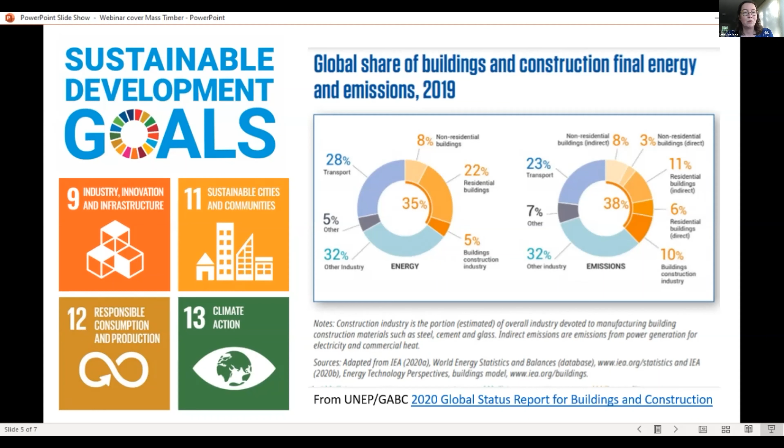Before I introduce our distinguished speakers, next slide, I would like to very briefly contextualize the importance of mass timber as a sustainability solution. Now, in 2015, the United Nations established a set of 17 high-priority sustainable development goals, which both provide a shared blueprint for achieving a peaceful and prosperous future for us all, and serve as an urgent call for action by all countries. I've highlighted 4 of these goals here.

Number 9, build resilient infrastructure, promote inclusive and sustainable industrialization, and foster innovation. Number 11, make cities inclusive, safe, resilient, and sustainable. Number 12, ensure sustainable consumption and production patterns. And number 13, take urgent action to combat climate change and its impacts. Utilizing mass timber helps us make progress on all of these goals.

I've also included a figure from the UN Environmental Programme's 2020 Global Status Report for Buildings and Construction. Now, as you can see, in 2019, buildings accounted for 35% of global energy use and 38% of global carbon emissions, with 10% of those global carbon emissions attributed to building construction alone. If sustainably grown and harvested, mass timber can be a greener replacement for steel and concrete and help decrease the industry's carbon footprint. Now, with that, let me introduce the speakers.

Our first speaker will be Thomas Corrado, a senior associate from Hickok Cole. He has been part of Hickok Cole Architects since graduating from Clemson University in 2006 with a Master's of Architecture. Thomas has worked on a variety of projects ranging from large-scale commercial interiors for the Department of Justice to projects that include the Center for Strategic and International Studies.

Our second speaker will be Eric Ross, a partner at William McDonough and Partners. Eric Ross has more than 20 years of experience in the building design and construction industry. And after 4 years of service in the Army, he earned both a bachelor's and a master's degree in architecture at the Savannah College of Art and Design. Eric joined William McDonough and Partners in 2013 with a background in hospitality, commercial, and high-end residential projects. Joining Eric Ross will be his colleagues, Alistair Riley and Joseph Marchetti.

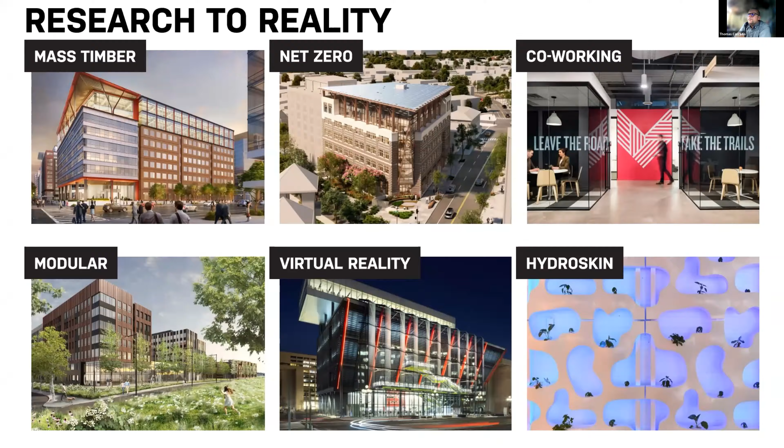I started looking at the mass timber component about 5 years ago. And that was really advantageous when we were approached by Columbia Property Trust to look at their 80 M Street project. So to set up a little bit about the project, the goal was to design a vertical expansion for the existing 7-story occupied office building, and to create an exciting and differentiated product within the DC market. We achieved our goal, and we're currently in construction on about a 100,000 square foot addition utilizing a full mass timber structure. We're adding 2 full stories to the building plus an occupied penthouse.

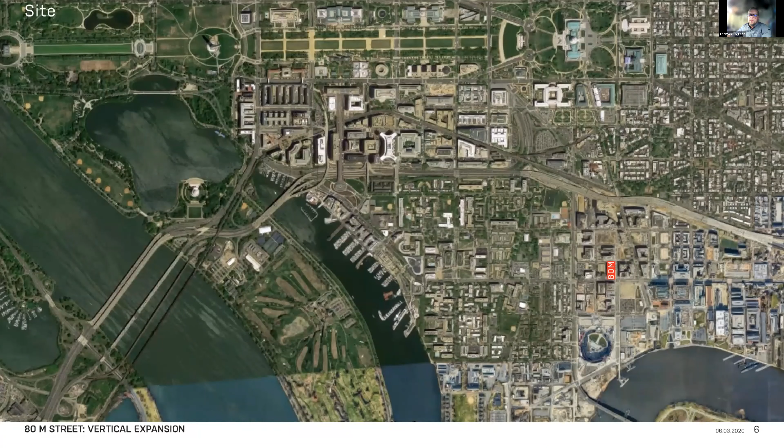The project itself is located in the Capitol Riverfront Navy Yard submarket of Washington, D.C. This neighborhood has seen drastic change over the past 10 to 15 years. It's truly a mixed-use neighborhood, a good mixture of commercial office, housing, and entertainment, which is a bit unique to Washington, D.C. Typically, we're all office or residential, so this is a really eclectic neighborhood, and there's a good vibrancy to it. The existing building was actually constructed in 2000 and was one of the first, if not the first, new development in that market in a long time. And in the last 10 to 15 years the neighborhood has really grown up around it.

And this building really was due for an update. The tenant on the top floor, the 7th floor, their lease was set to expire. So it was the right time for Columbia to really pursue the addition. That vacancy on the 7th floor was really paramount in allowing Columbia to investigate how to vertically expand this. Not having that tenant there, with the remainder of the building being occupied, really allowed us to explore how we were going to do this.

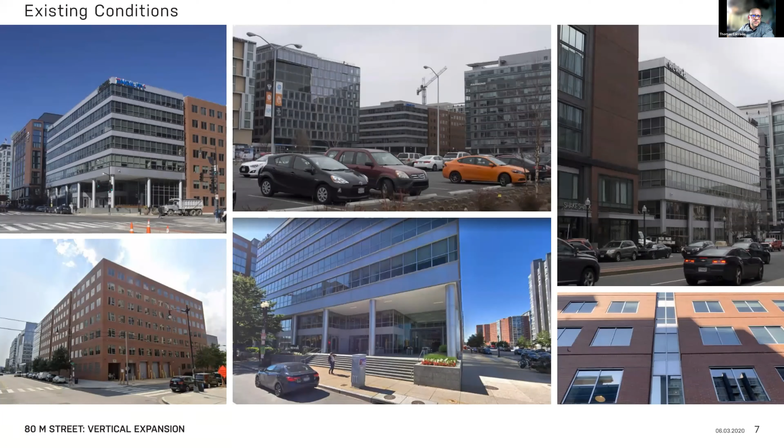So what you see here on the screen is some shots of the building as it existed prior to construction. You can see it's a 7-story structure. It's all concrete. It's a moment frame, and it's a 30 by 30 grid. I'll get into some of the more specifics in a few minutes. But let me jump to the next slide.

So before we arrived at timber as a solution, we really needed to understand the parameters driving the vertical expansion by itself. Vertical expansions are pretty common in Washington, D.C. We see quite a bit of them, and historically they've been done with steel. And that's even an oddity in that DC is really a concrete town. Most of the construction that we do primarily utilizes concrete. But steel has been a way of doing these vertical expansions because it's lighter than concrete, so it offers less stress on the existing structures. In this particular case, the existing structure and the zoning were the two driving constraints and parameters we were looking at.

We developed a number of scenarios to explore the potential of what we could do. And we quickly understood that our limiting factor here was going to be the existing structure. The zoning that we were working with would have actually allowed for 3 full concrete floors plus a penthouse, but the remediation to the structure just wouldn't have been cost effective. There really would have been no way to make it profitable or to make it worthwhile.

So it was interesting because it really became clear right away that we were probably going to be limited in the amount of density that we could put on. And so we understood really early on that 2 full stories and a penthouse was probably the answer and where we were going to end up in order to not impact the existing structure too much.

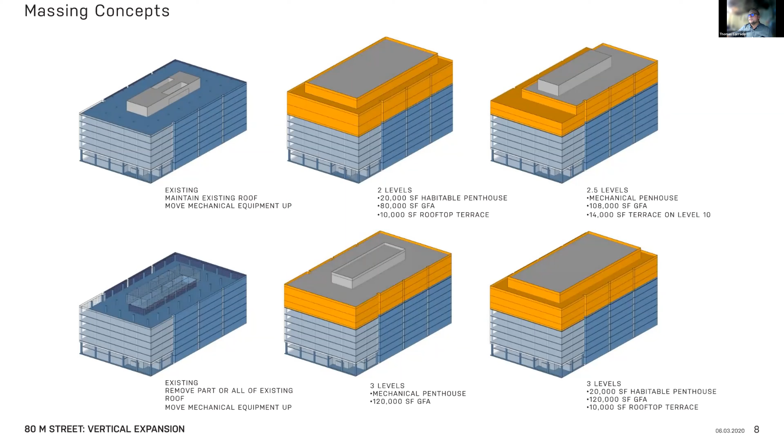So where we ended up in our final section is we have 2 full timber levels that have a slab to slab height of 16 feet. And then we have an occupied penthouse up above that with about a 16-foot slab to slab height as well.

One of the things I want to note here that's pretty interesting, but not in this particular illustration, is that the existing roof wasn't designed to handle an occupied live load for office use. So we needed to reinforce the roof. We looked at utilizing carbon fiber, but that became too costly. But here we were again with this additional height. So we ended up abandoning the existing roof in place, and we created an interstitial layer of steel structure that posted up off of the original concrete structure.

And this was advantageous because it allowed us to reset the grid and create a new structural deck. And it's proven to be really beneficial in construction, in that Davis Construction, who's building it as the GC, was really able to optimize the modularity and the prefab nature of timber. By setting the grid, we didn't have things showing up on site and all of a sudden having to do tie-ins to the existing structure. We were able to set that structure in this interstitial layer.

It also allowed us to reset the grid and go off grid in certain areas where we could transfer off of that, where we wanted to set the building back in places, as you can see in this image, to create terrace space on the new floors where we thought that would be advantageous.

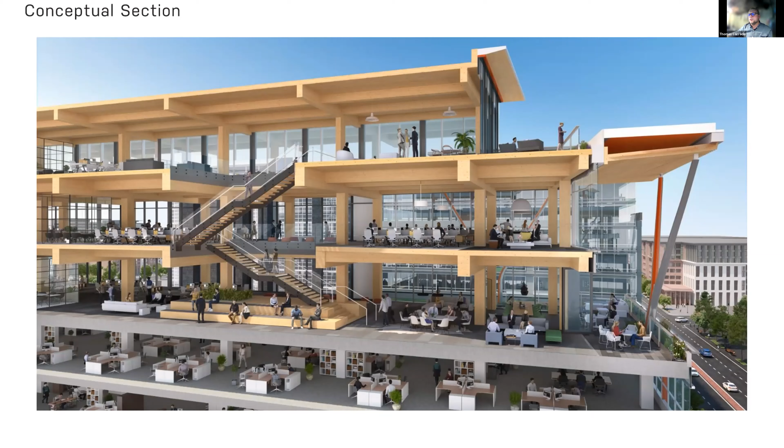Another thing you can see here in the full building section is those top floors and how much greater height they have over what is a typical office floor dimension in Washington, DC. And this was really nice in terms of the overall daylighting. We're able to get a lot more natural light deeper into the space just from having these taller floors. So when you combine that with a wood interior environment, it makes for a really spectacular office environment. And I'll show you some images a little later in the presentation. You can start to see how that's starting to come to fruition here.

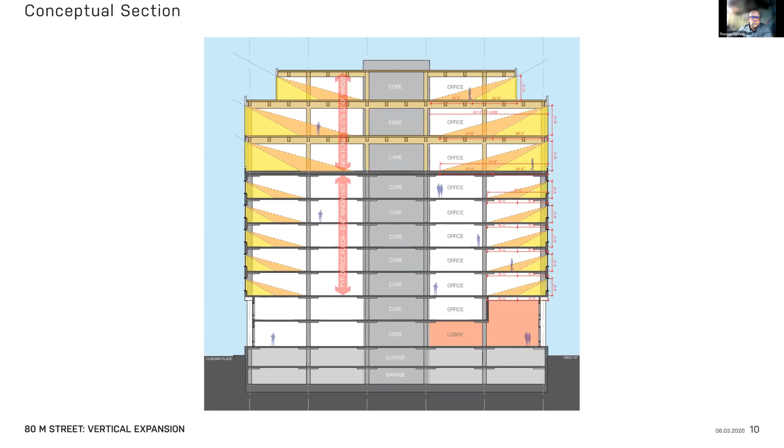With regards to code, this is kind of interesting how we actually were able to build timber above 85 feet. When we started this project, DC was under IBC 2012. So you could build mass timber under Type 4 construction, but you're limited to 85 feet. And of course we knew that the 2021 code, and the images that you see on the screen here, was going to allow timber at a taller height.

Using that knowledge, we had started meeting with DCRA during our research process, DCRA being our local code officials, and had been talking with them about how can we do timber? How can we do this? And they kept saying, well, bring us a real project. Let's find something tangible. Let's find something real, and then we can do that.

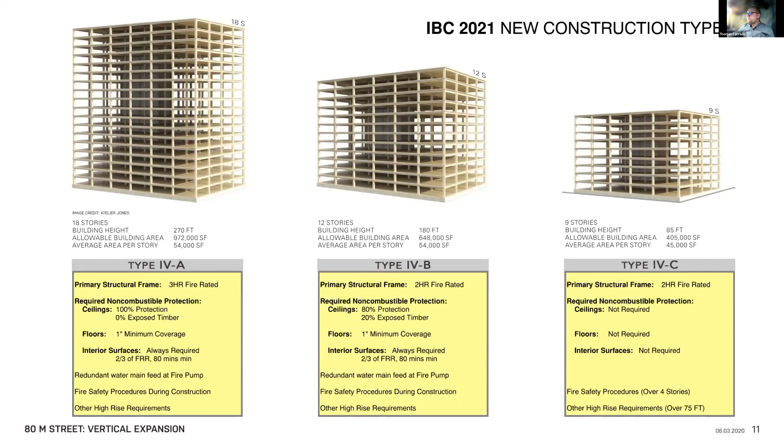So we looked at these 2021 codes for guidance, even though they hadn't been issued. And we started to think about and talk to DCRA about how we might fit our project within these three new types of Type 4 construction that were going to be introduced. The interesting thing is that we really didn't fall in any one of those. We kind of fell in between, because we are really a 3-story timber structure going on top of a 7-story concrete structure.

So how we are defining ourselves is as a 3-story Type 4C building over top of an existing 7-story Type 1B building. So at the end of the day, we're not 85 feet. We're really only 40 feet. And we got DCRA to work with us and to agree to see us in that light. And so we were able to develop a code modification in order to build a high-rise, because we're over 75 feet, timber structure within Washington, DC.

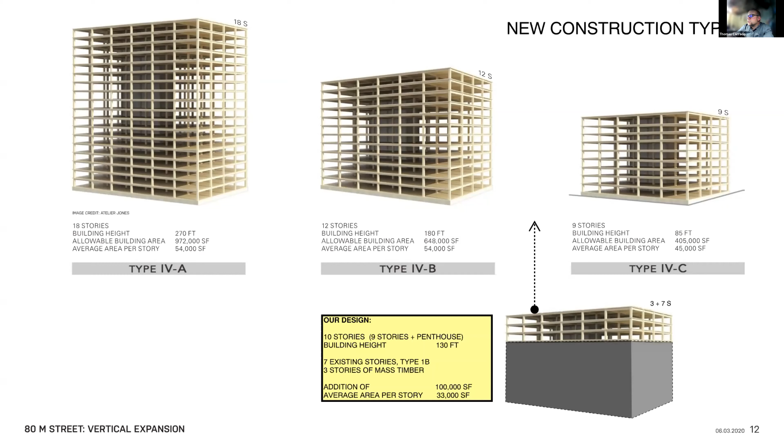Our code modification is essentially that: a timber structure over 85 feet, in our case up to 130 feet, which is the limit as determined by zoning. We also included a few life safety measures. We added a redundant fire pump, which is one of the stipulations that falls under the 4B construction type under the 2021 IBC. That was something we gave to DCRA, not necessarily as a concession, but something we were looking to do to bolster the life safety aspect.

Type 4B allows you to go to a taller structure, but it also requires you to cover a large quantity of the timber. And we were not looking to do that. We wanted to have a fully exposed structure. So we were looking for ways to work with DCRA to allow us to keep that structure unencumbered. The second thing we did there is we upgraded our sprinkler system to regular duty instead of the normal light duty that we would be doing in commercial construction. And so that was really beneficial.

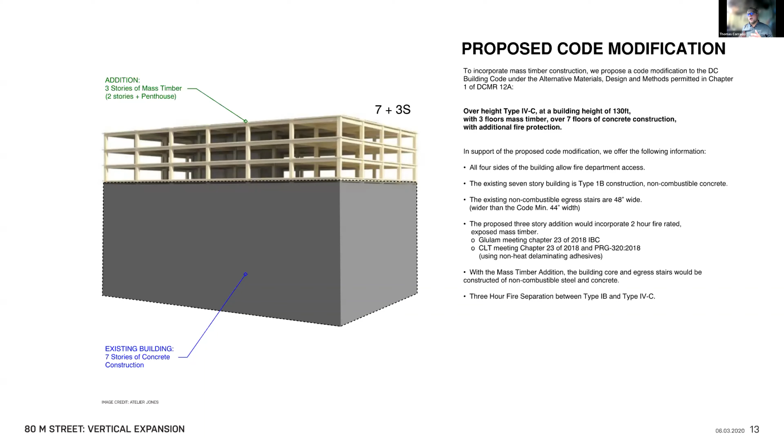We did this early on in the process too, right at the beginning of schematic design, because if we weren't able to get this code modification, then the project really wasn't moving forward. So we worked really closely with our partners at Arup, our engineering partners, plus Davis Construction, plus ownership, and we got the package put together and went to DCRA, and we were able to get that going, and that really set us in motion.

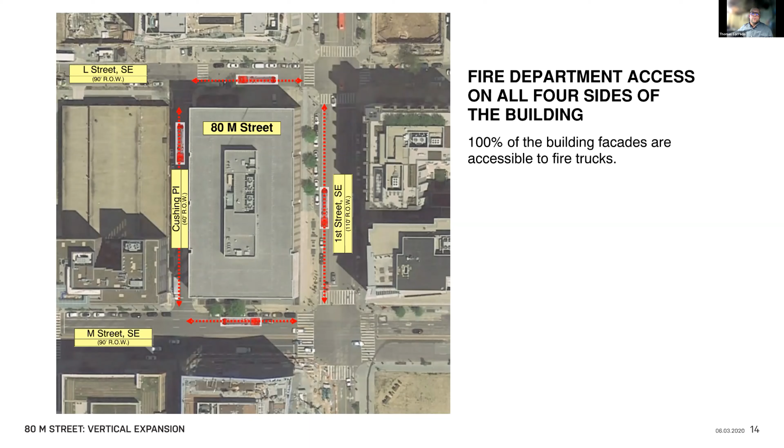One of the other interesting things that we discussed with them was that the building is freestanding on all 4 sides. It has access on all 4 sides for a fire truck. That's something you don't normally see in the district. Normally you're in an alley condition or have a neighboring building. So we were always looking for ways to make this more palatable, because again, we were the first, coming out of the gate, and nobody really knew it. We were just trying to make people feel comfortable with what we were suggesting and bringing to the table.

One of the other things we did is we designed the core as a steel structure. And this was really for 2 reasons. First, we kept our egress stairs in a familiar construction type from a life safety standpoint. So there was a comfort level, again, with the code reviewers. They understood that this was a steel structure. So if I'm in the timber structure, in case of emergency, I'm getting into a stairwell that is a familiar construction type.

And not only that, as I move and I traverse from what is the new 8th floor to the existing 7th floor, I'm going from steel, fireproofed, 2-hour rated, through a 3-hour horizontal separation, and then down into my concrete stair of the existing building. So that was another way of just thinking about a comfort level.

The second thing was that we used the steel as kind of a lateral structural system. At the time, timber wasn't allowed to take lateral per code. So we were looking for the steel to do that. The existing building itself is a moment frame. And so when we added the new floors to the structure, we needed to account for the new lateral loads that were going to be imposed on the building.

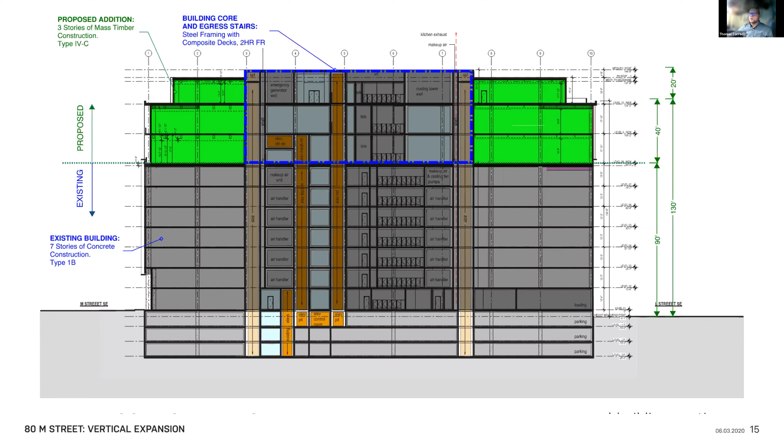And so there were actually no shear walls down through the existing building. So we created brace frames within the footprint of the existing core, and then tied those down into the moment frame as you move vertically down through the building.

At the end of the day, one of the really interesting things was that the wood structure proved to be so light that we actually only ended up remediating and reinforcing 4 columns through the existing building. So we had really, really minor impacts to the existing building all the way down. We didn't have to do any upgrades to the existing foundation.

So we added 100,000 square feet onto this building with no upgrades to the foundations and really minimal remediation to the existing structure. So in terms of overall costs of an addition and adding square footage, it was a real benefit. And timber, I think, led us there. Now, could we have done this similarly with steel? Probably, but the timber certainly has those same attributes. And at the end of the day, we feel like we're providing a better environment.

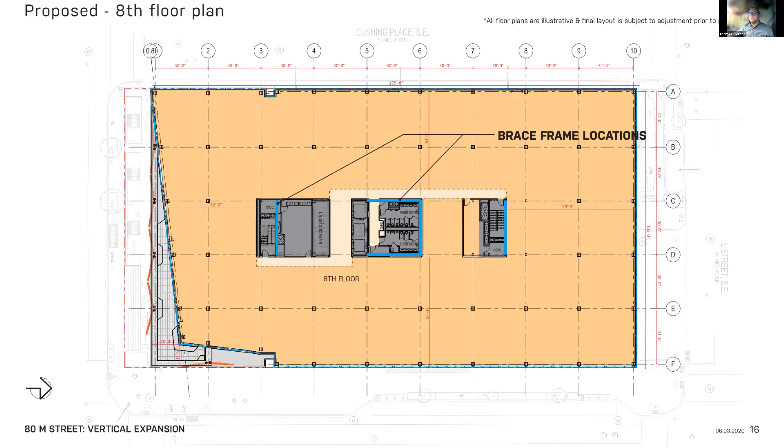Oh, went too far. Sorry. In terms of the typical bay, as I had mentioned previously, the existing column grid for the building is a 30 by 30 grid, which is not necessarily the most optimal when it comes to timber. Timber performs really well in about a 20 by 20 grid. You can keep the member sizes down. They don't get so big.

But in this case, we had the height. We knew we were dealing with a 30 by 30. And so we were able to accommodate these large beam sizes here. So you see our primary girders are upwards of 36 inches deep, and then our secondary beams are 27 inches deep. And we were required to have secondary beams because our CLT panels are spanning that entire 30 feet. So we needed that reinforcement.

The 30 by 30 grid has always been one of our large impediments to timber within the district, because that's the market. That's what the market expects in terms of our column grids. But timber, as you can see here, is challenged to perform at the heights that we typically see, which are normally around the 11'6" range for a concrete structure.

So the overall deck or assembly consists of the primary and secondary beams, and then we have a 5-ply CLT panel. And then we installed a 1-inch Acousta-Mat, which is there to get STC ratings between the floors and to help with footfall. And then we actually have a 3-inch reinforced concrete deck.

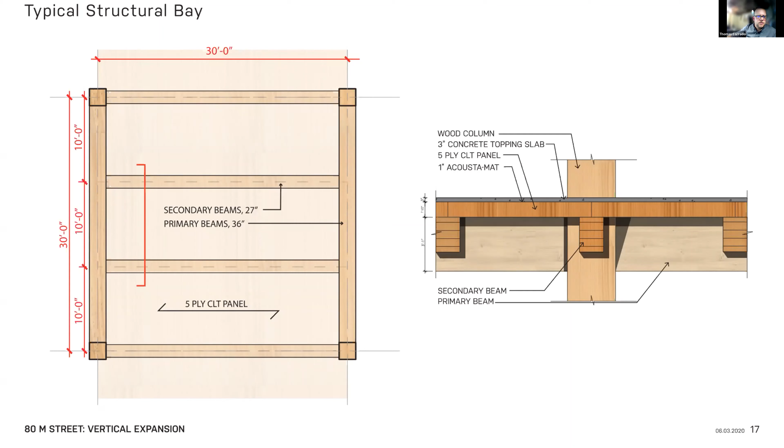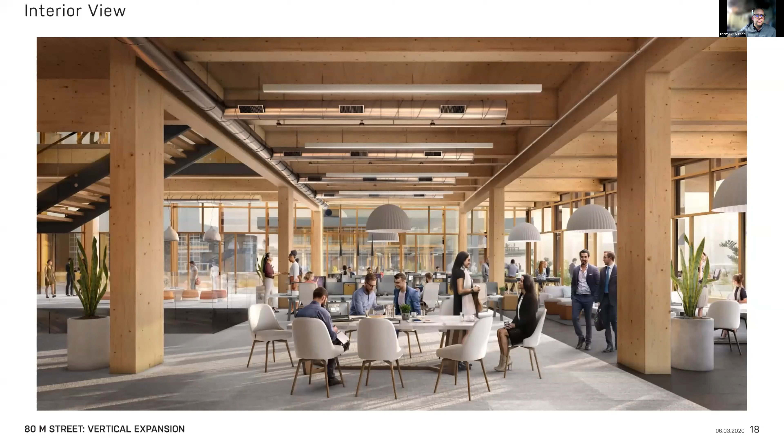Another interesting thing is that because we are a high rise, we were required to have a 2-hour fire rated connection at all of the column to girder connections, as well as the secondary to girder connections. And at the time when we were doing this, there was really only one 2-hour connection on the market. And in our opinion, it wasn't something that was best suited for the project and the type of environment that we wanted to create.

So we worked with Katerra, who is the CLT supplier and installer, and they developed a 2-hour connection for this project. And so they're steel connections. They're completely encased within the timber, which provides the fire protection for the steel itself.

We were able to do this because we had some other aspects of the job that allowed us to have some time. So we were able to accommodate the testing of these connections because we had to expand the elevators. We had to do the reinforcing of the structure itself. So that was advantageous because at the end of the day, we were able to get these approved.

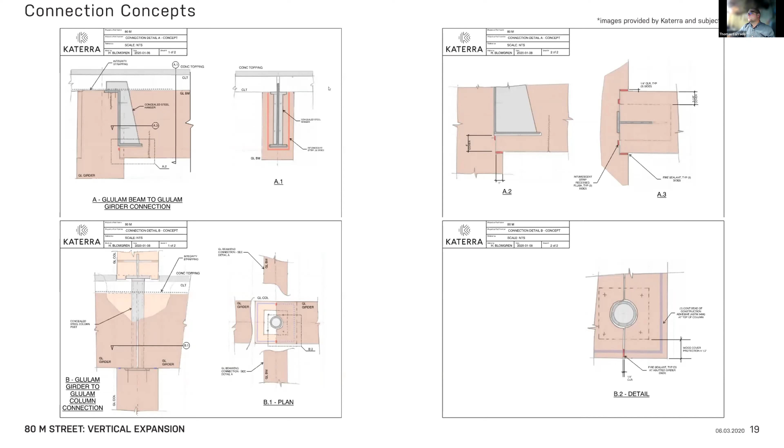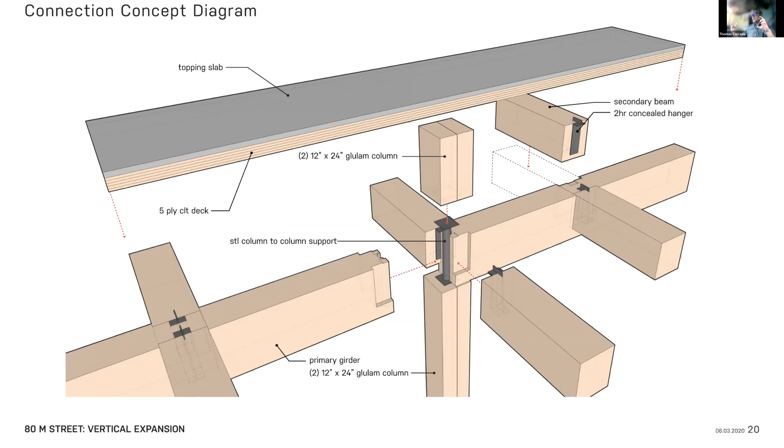And that was really, really beneficial. So what you could see here is kind of that assembly. Each one of you have a post that goes from column to column. The CLT decks go across the primary and secondary beams, and then the secondary beams are kind of hung with these hangers into the primaries, and then everything is screwed together. Everything then is concealed within those connections themselves.

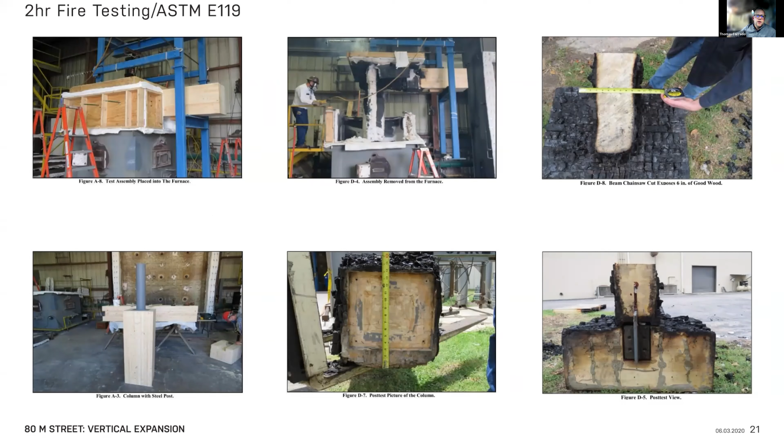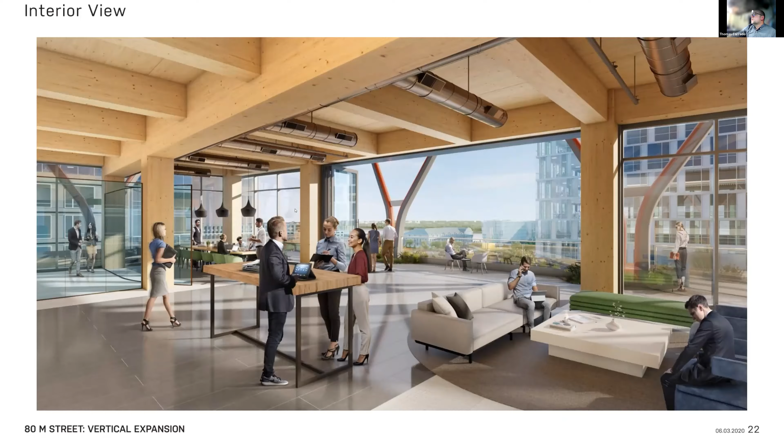And there's 3 ways of looking at it. You can use mass, stiffness, and/or dampening. And Columbia Property was concerned about bringing a timber building to the market that may get a bad reputation if it was deemed to have too much vibration within it. So we worked with Arup, and they actually have a technology.

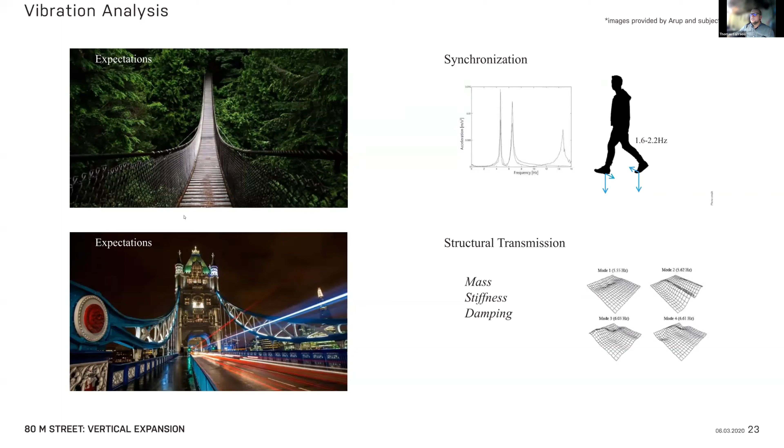They actually have a technology here called a motion platform, where they're able to replicate the vibration of concrete, steel, and timber structures. And then we were able to optimize the design to meet whatever standard we wanted to meet. In this case, we designed the timber structure to feel and act like a steel structure.

And to do this, we added density. We added a couple inches to each one of the girders and a couple inches to each one of the secondary beams. And that ultimately will take some of the excess vibration out in order to get this to act and feel like a steel structure. And this was advantageous to Columbia, obviously, because it takes away some of their risk.

But it was also good in that this is the first commercial project in Washington, D.C., and I think it's important that their market gets comfortable with this new structure and this new technology. And so, by doing that, they're covering themselves, but I think they're also delivering something that everybody will feel really good about at the end of the day.

And I could say in practice, having people come out to the building and visit the structure and everything, it's been really well received in those regards. It's still under construction though.

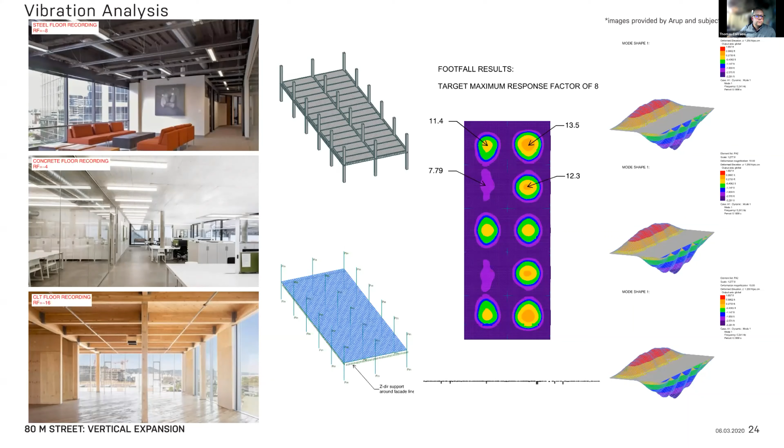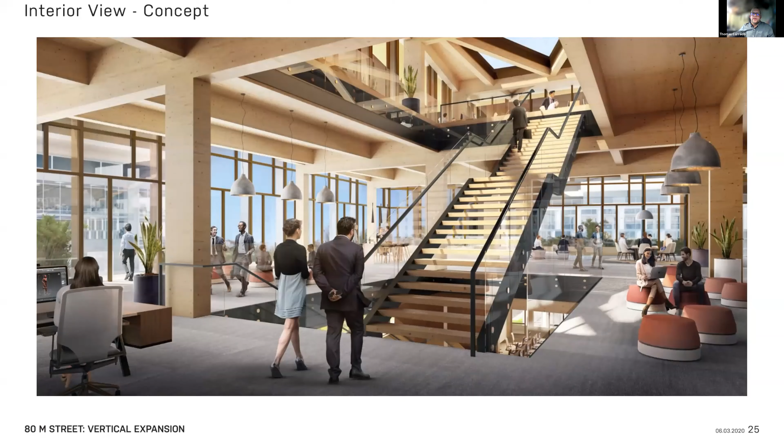There are some different considerations. So it is important to think through your designs and really dot your I's and cross your T's, so to speak. And the same can be said with the exterior envelope systems. If you're using a curtain wall, then you need to design for a curtain wall. And the structure can handle that. It can handle precast or brick. You just need to design to those things. So it's important to work with your partners and to think about those things up front.

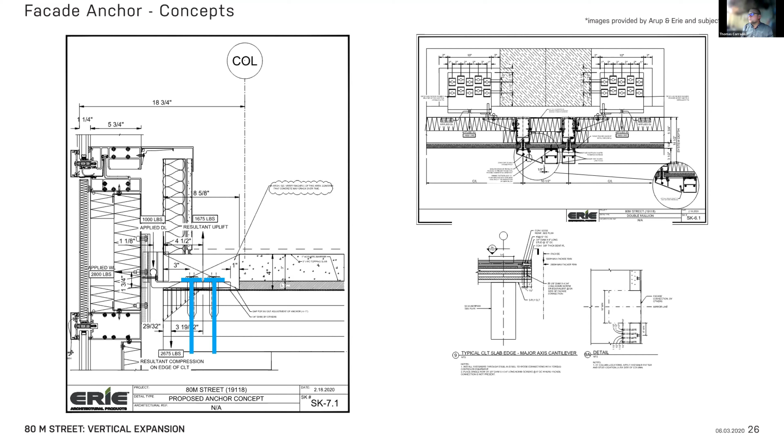And then in our case, we were using for the majority a standard curtain wall system that's going to be hung off of the edge of the timber itself. And so here you can see we worked with Erie, who's the curtain wall manufacturer, and Katerra to work through those connections. And at the end of the day, we're using the same curtain wall anchors that we would normally embed in a concrete structure, except in this particular instance, we're screwing them down into the timber itself, using timber grade, commercial grade bolts. And so that suffices. That's the manner of doing it. And so having knowledgeable industry partners has been advantageous to us in that regard.

And you can see here those connections, and they're screwed at the slab edge. And then you can also see in these images the reinforcement for the structure. So you have the slab edge with the bolts back through that will grab the concrete, and then the reinforcement. These all get tied in, and this will actually move that lateral force back into the steel core itself. And then the curtain wall, which is actually being hung now, will get hung on these anchors just like any other curtain wall structure.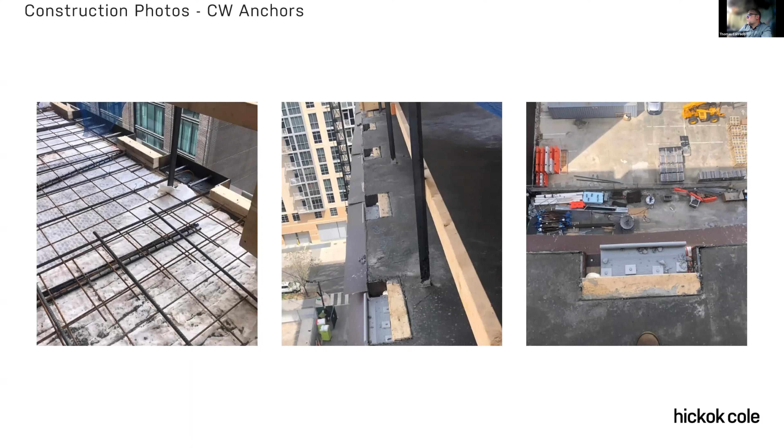With regards to the construction itself, here's a couple photos. These are actually a couple weeks old at this point. There was approximately 70,000 square feet of timber structure that was delivered on site. This all was erected by Katerra. They produced the CLT panels themselves. Nordic out of Montreal was the supplier for the glulam. But Katerra did the install for all of the timber on this particular job. It was installed by a team of 7 that came from Katerra's factory in Spokane. And they installed the full 2.5 levels of timber in 7.5 weeks.

It was an on-time delivery, so the trucks would show up on site, and all the CLT and glulams would be picked off by the crane. They would work on one side, 3 guys setting beams and columns, and another 3 guys on the other side. As those were getting installed, the crane would move over and be picking CLT panels. So it moved very, very quickly, and took a crew of, like I said, seven individuals to install. So in terms of labor and time, I think there's a lot of savings. This project's a little different in that we did have steel and we have the reinforced concrete, so we have a few more trades that maybe you wouldn't normally see in a timber structure. But nonetheless, it was still very, very fast.

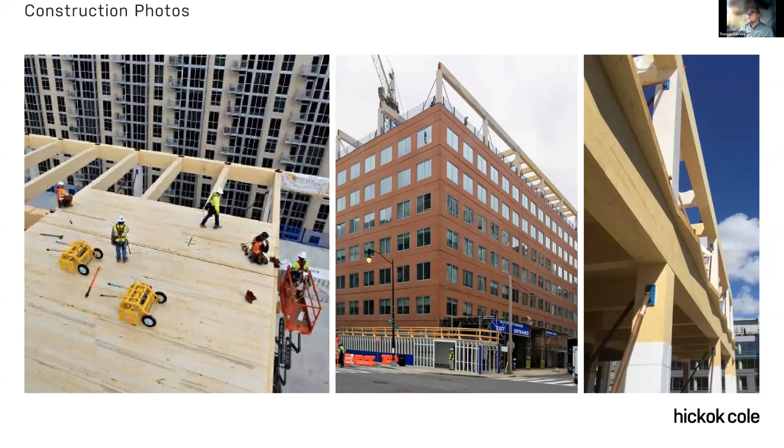And then you can see here, this is what the inside of the space will start to feel like. So really gracious spaces. You can see those beams in this particular image. At the end of the day, when we added depth to the beams to get the vibration out, we ended up at 38 inches deep. And I would say to you here that those don't feel like they're 38 inches deep. Because we have so much height in the overall structure, we're able to accommodate that and make for a really, really amazing interior space.

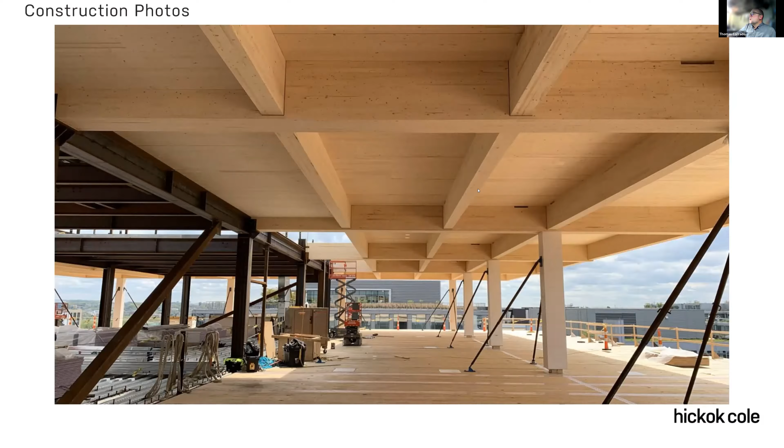And then lastly, some of the ideas of carbon sequestration and the sustainable components for this particular project.

And I think Leah was kind of hinting at some of this earlier. 39% of greenhouse gas emissions come from buildings, 11% of which is the embodied carbon from building products and construction. And I think mass timber holds a special place for us in order to reduce that and contribute to these high performance and low carbon buildings.

In fact, recent research suggests development of mass timber buildings constructed globally will double every 2 years between 2020 and 2034, which will allow North American building construction to reach carbon neutrality. So those are lofty goals, but they're there.

80M itself uses about 1,400 tons of mass timber, again, which is all manufactured, sourced, and installed by Katerra. That incorporates about 2,500 cubic meters of timber, and the wood necessary to produce this timber for this project could be grown in 8 minutes in North American forests. So just some interesting things about the sustainable nature and the renewability of the resource itself.

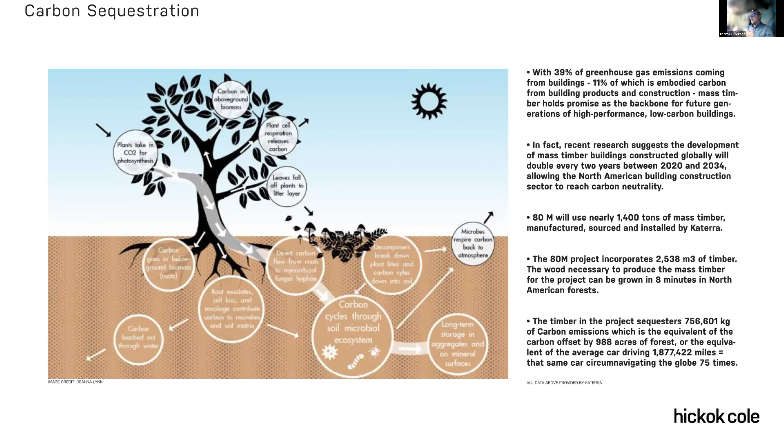And in this particular instance, the project sequestered a large amount of carbon, which is equivalent to driving around the globe 75 times. So just some metrics we're thinking about, trying to use the data and put it in a way that people understand. Thinking about how much a car would drive and how much time, that's how much carbon we're taking out of the environment by utilizing timber in this scenario.

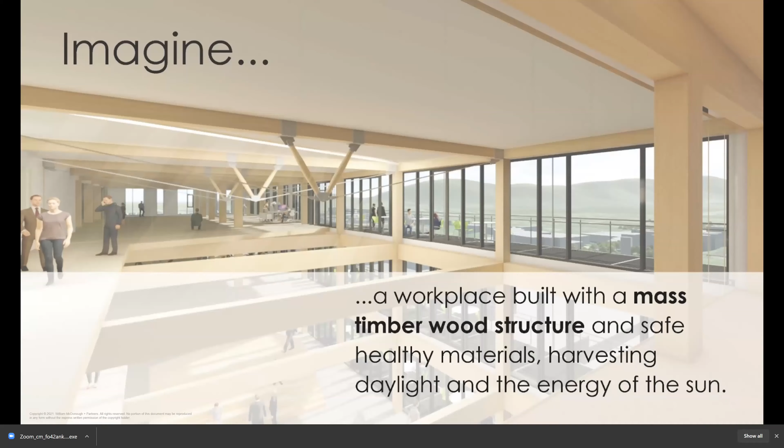So we're going to talk about Apex Plaza. As Tom said, the story around wood and the impact is a critical one. Apex came to us with the idea of how they could bring their workforce together in one place. Apex is a clean energy company that was a startup out of the Darden Business School at UVA back in the 90s. They've since grown. They were in 3, if not 4 different buildings, and their first desire was to get everybody into one office so they could collaborate. The next was to prove what they're doing with the energy grid, and think about embodied carbon and offsetting that carbon within the building systems.

When we approach a project, Bill McDonough likes to talk about the 5 goods: good, clean energy, safe and healthy materials, clean water, circular economy, which we'll talk about a little with design for disassembly, and good lives. How can we create safe, healthy buildings with maximized daylight, views and connection with nature? When we take those to Apex Plaza, one of the first things was going for carbon-free energy. So how could we be 100% renewably powered on site, going all electric, getting away from fossil fuels, and then operational energy as well.

We've got battery backups for Apex. So a focus for them that became clear from the start was, how can we think about climate-friendly materials? We focused on mass timber. We've been working with Nordic Structures and other timber suppliers in Europe. We've done 4 different projects, so going with mass timber made perfect sense.

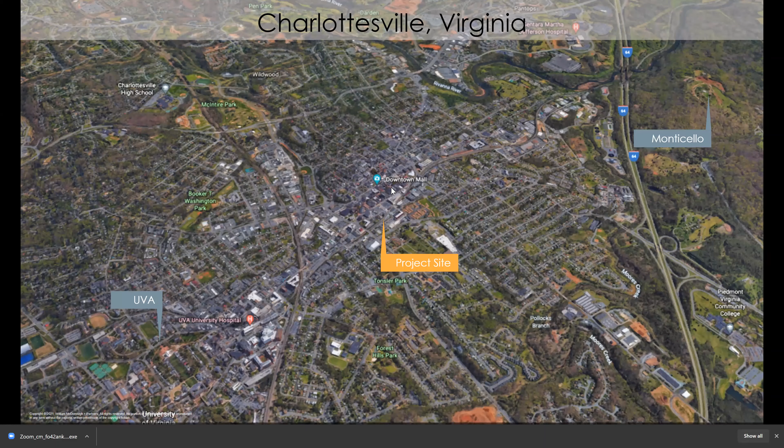So as I mentioned, Apex was a startup at UVA Darden School. They're spread across 3 different buildings downtown. So they really have this desire to stay downtown, to be connected to the downtown pedestrian mall. And they were able to do a partnership, which was ACAC Fitness Center had this vacant lot, which was surface parking. Hourigan Development came on board, and then Red Light, which is a local development company as well.

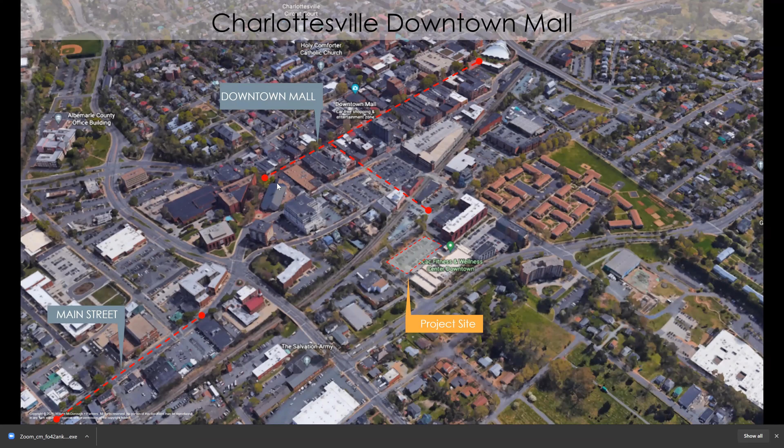So Apex really wanted this idea of how do we keep our jobs downtown and have our people with easy access to the downtown community. And there's a free trolley service that takes you to Main Street and back to the university. So it's basically a gravel lot.

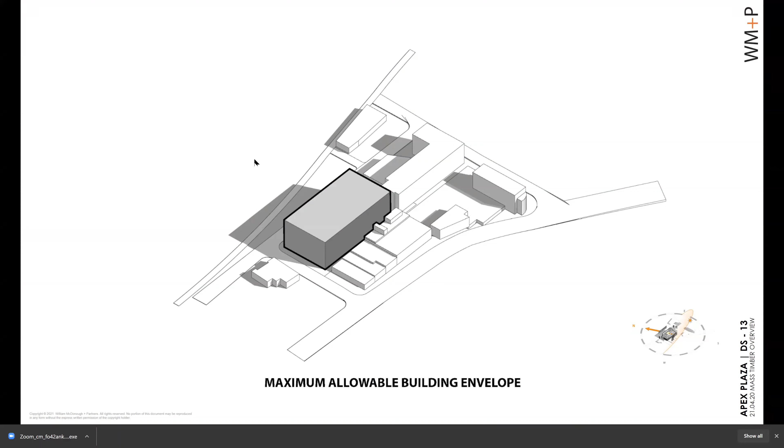When we started, we looked at maximizing the building envelope in allowable storage. We've got an apartment building next door, so we wanted to respect some of their views. We're accommodating both parking for the ACAC Sports Club as well as the office. So we've got basically two levels of mixed use retail and then 2 levels of below grade parking. So we've got bicycle parking, electric car parking, kind of all on grade that's accessible to the group there.

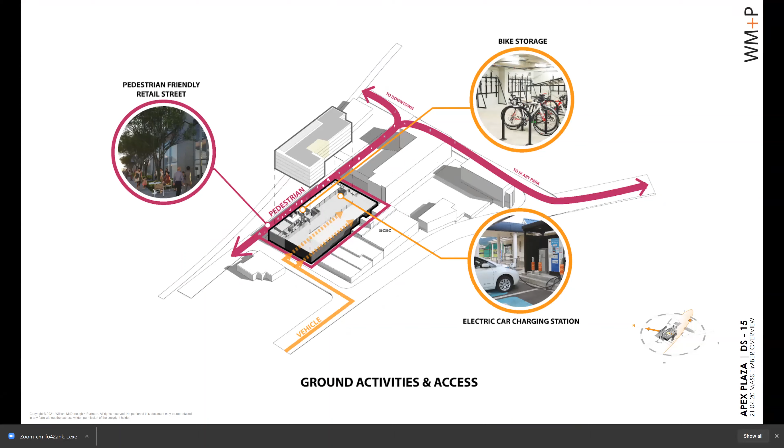Then the next thing was how do we shape the building for the sun and solar access and views? And we've got long views to Monticello and the mountains to the south, views to downtown to the north. And then we've got a nice green podium for outdoor landscape area.

As Tom mentioned in his, we've kind of then tried to think about optimizing the grid. 30 by 30, as you mentioned, gets into a stretch and we get quite large members. So here we're able to work with the parking grid and reduce that width to a little more than 20 foot. 20 feet, 8 1/4. And the advantage to 20 feet in one direction roughly is that the CLT is then allowed to double span across 2 bays. And by doing so, it provides the primary lateral stability for the structure.

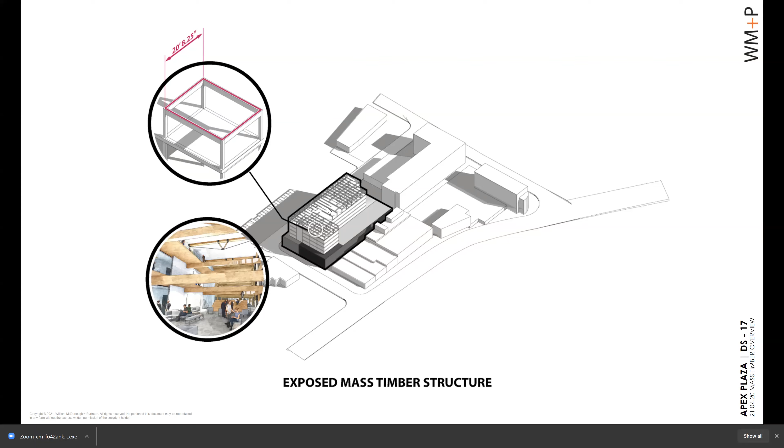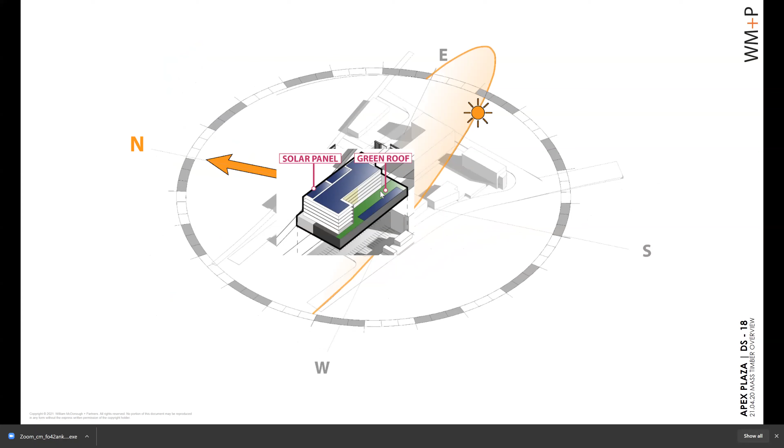And we're able to get rid of the purlins that would normally be there for bigger grid spacing to provide some pathways for service routing, MEP services. Part of shaping the building too is to do these narrow bars so we get natural daylight into all the office space, and then optimizing the roof for solar integration. And as you mentioned, kind of a green roof terrace to the south.

So that was kind of jump right into. We have basically 2 levels of mixed use. We actually do have an apartment in the building, ground floor retail, some first floor mezzanine offices, parking below, and then 6 stories of mass timber, and then an occupiable roof terrace as well. And you'll see it in the section that's coming up.

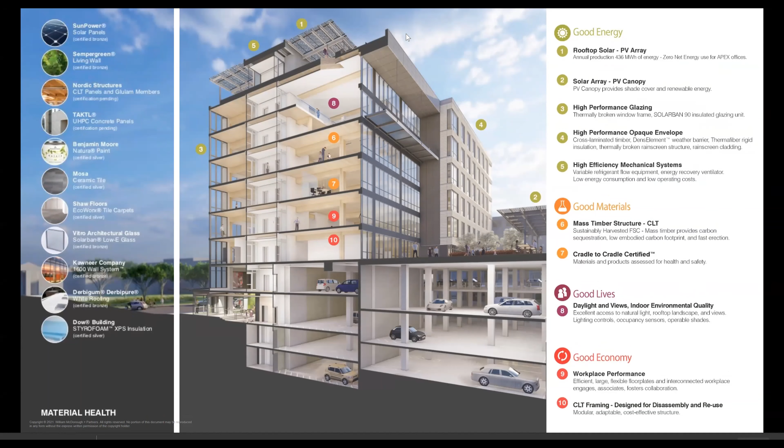So from a code perspective, we are a code compliant type 4 mass timber building on a multi-story concrete podium with a 3-hour horizontal separation. And so similar to Thomas and Hickok Cole, we worked with Arup and their fire protection experts on a code modification for the city of Charlottesville. They were very accommodating partners in that process, and they brought in some people on their side to be their advocate and vet the ideas that we were proposing.

So they had the code official from Martinsville, Virginia, who was on the IBC Tall Wood Ad Hoc Committee, the group that wrote the new code that Thomas showed. Yeah.

And so we brought those pending or forthcoming code features for life safety and implemented them on the building so that the building officials would be comfortable with approving the project. So at the end of the day, we ended up with a concrete podium, the 6 levels of wood, and we're actually 101 feet. So we're beyond what the typical code is, 85.

And then we're able to do an occupiable terrace with a PV canopy. So we're generating energy as well as having an amenity. Apex has the upper 4 floors, and they've got a kind of 2-story atrium and balcony breakout. As I mentioned, we've got electric parking, and then we have battery backup systems. Hold here for 1 second.

And so this slide for us kind of represents the layering of the 4 goals Alistair presented at the beginning. But Joe, if you're there, these features for the development team really became integral both for Apex, but also for the other tenants who are coming into the building. And Joe, if you want to just talk about the differentiating features they became for the marketplace.

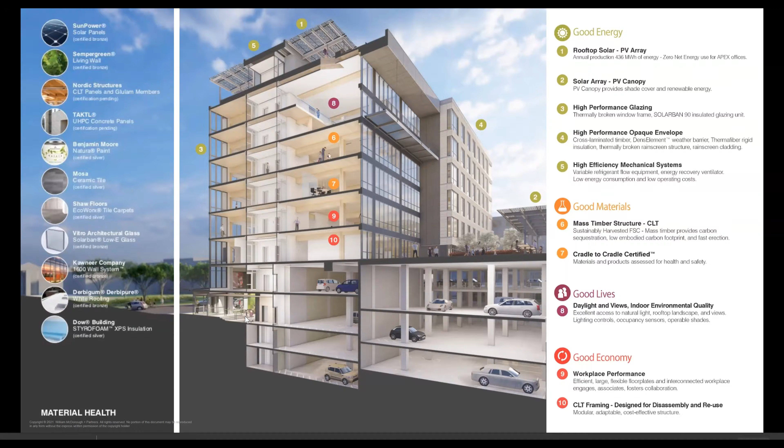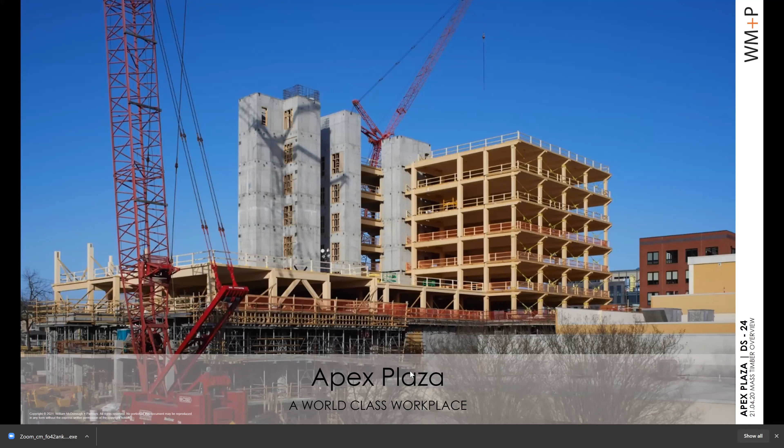So Apex has a hard date, as Alistair said, they're in 4 buildings, but they have to be out by the end of the year. Yeah. And so it was imperative that the team come up with a way to build the project to deliver at that time. And so they phased construction to build the east side first while we were still completing the west side. So as that west side was being completed, they've already started the east side to enclose the building. So it's been a real Herculean effort to stay on track. But again, as a collaborative team, we were able to come up with these solutions to deliver the project on time.

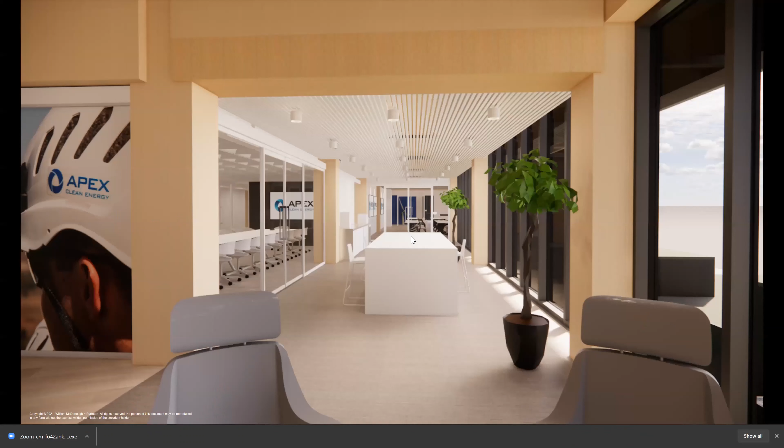These are some of the views of Apex. Again, they're the anchor tenant, so they've got the upper 4 floors. So predominantly exposed wood with the ceilings in that. We do have some acoustic felt ceilings in some of the common areas and conferences. They do have a couple floor penetrations. And again, they have a double height atrium at the entryway.

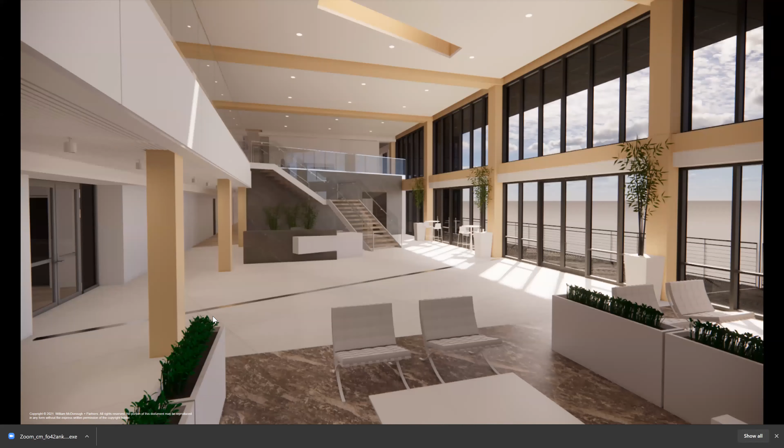Part of the design featured this true north skylight. So at solar noon, we get a reflection or sunburst on the floor. I'll get some shots of that. Again, a big focus was renewable energy. So we wanted to think of all of the places that we could integrate PVs.

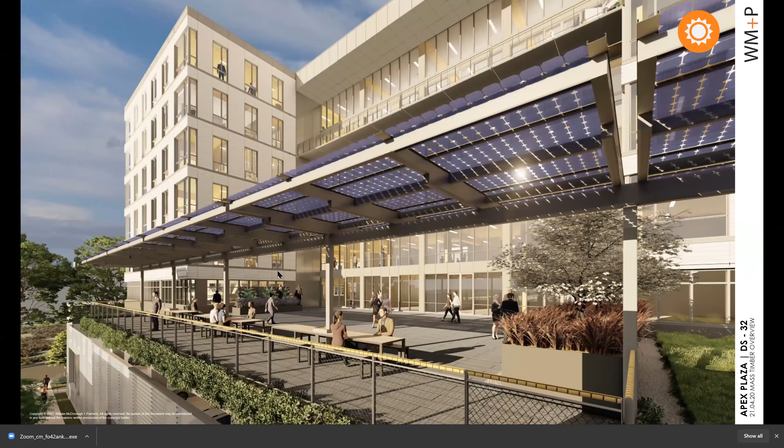So we've got traditional roof mount PVs at the roof level. We have an upper PV canopy, which ends up with amenity space below, as well as a PV pergola on the 3rd floor terrace, as well as the outdoor green roof. So with that, we're able to be net energy positive for the Apex floors, as well as provide battery backup for their power systems. This is the upper level roof terrace, the solar pergola.

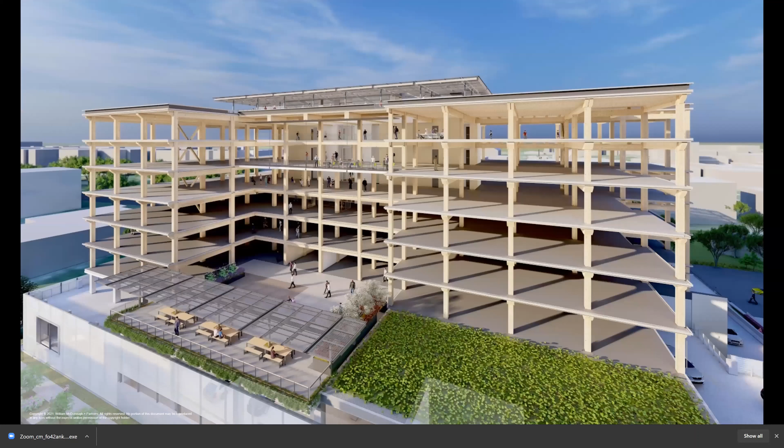You want to talk about timber? Yeah, so timber for us has really been integral. I've been here since 2013, and as Alistair said, we've done 4 projects, but we really look at timber as an option for every project at this point. And a lot of that ties back into what Leah was showing early on with the UN Sustainable Development Goals and their target to reduce embodied carbon emissions by 30% by 2030 and ultimately 0 by 2050. So we do see timber as a key partner in helping us achieve those goals.

We also know that steel and concrete will play a role, and we are always investigating low embodied carbon strategies for those materials as well. But again, Apex was keenly interested in the idea of mass timber. And so for us, we've built a bank of knowledge over those 8 years regarding the topics you see here. So always staying abreast of the latest fire resistance studies and tests that are being conducted. Utilizing the product for its advantages.

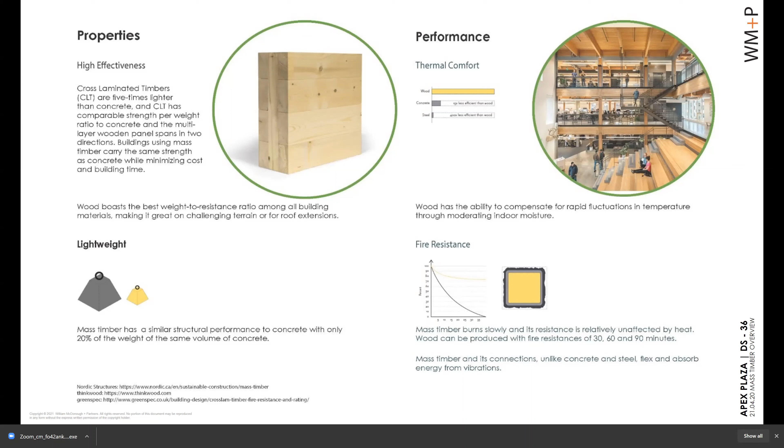So it is a structural material, but it's also a finished material. So you're getting this beautiful aesthetic finished product from your building structure, which has advantages from a biophilic perspective, bringing the nature inside for the workers, but also not having to come back and clad all these structural elements with finishes. So timber, when sustainably produced and harvested, gives us an embodied carbon bank before we even start the project. So for this project, we're using black spruce, which is rapidly renewable.

Nordic Structures in Montreal and Quebec have managed their own forests. They're a vertically integrated company managing their own forests. So they've been at the forefront of FSC practices for decades and have earned the newest FSC certification, which highlights their efforts to improve the lives of the indigenous people. So taking their sustainability ethos to the next level. So we know we're getting a carbon bank before we even start.

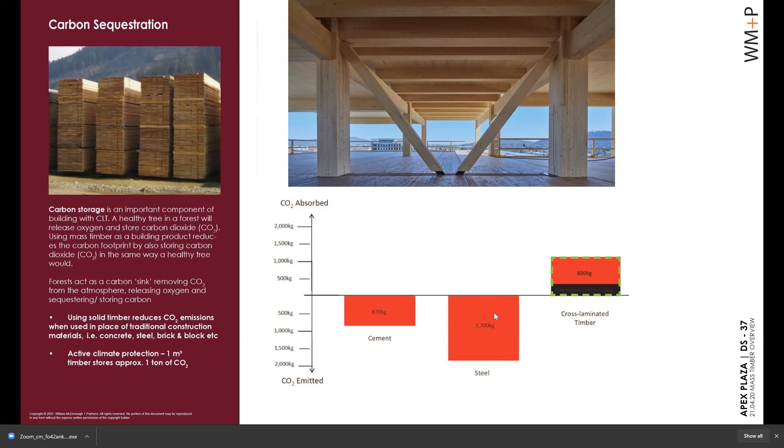But that percolates through, for new construction, down through the concrete. So we've got lighter concrete elements, smaller foundations. And then ultimately we like to do the balance to see where we're truly starting from a structural standpoint. When targeting embodied carbon, you want to go after the structure because that's where the most mass is and thus the most embodied carbon. So the strategies for superstructure and substructure are critical to getting a building below that threshold to hit those overall embodied carbon targets.

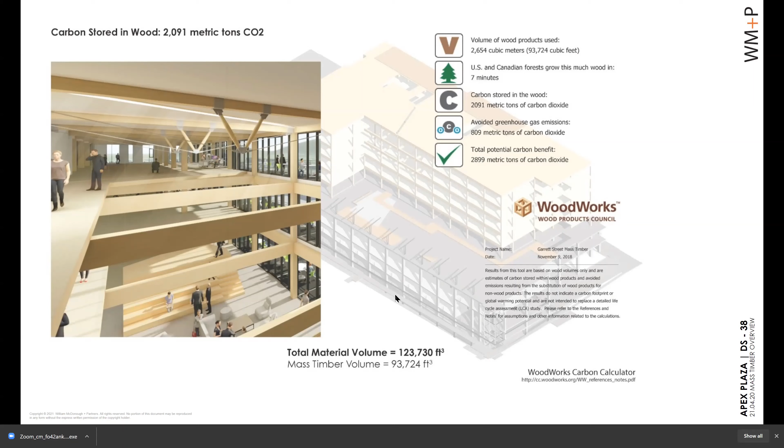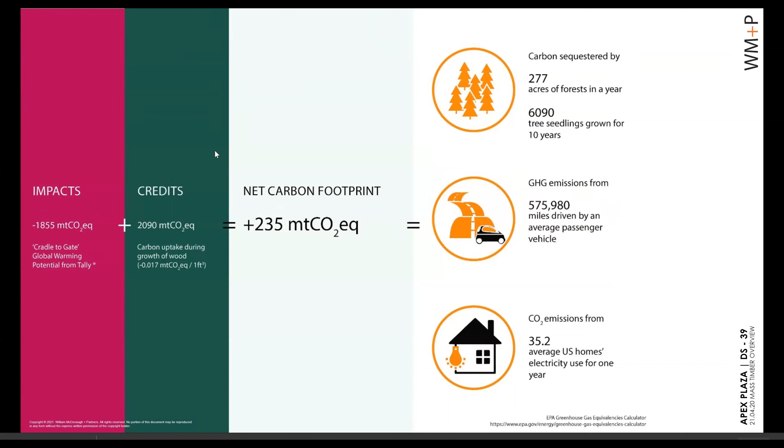And so you can see here we're sequestering 2,000 metric tons of CO2 in our wood, which is great. And then balancing that out, we have a net carbon footprint for our structure before we start. And then again, as we think about the other systems, the enclosure, the cladding, we're always thinking about lowering the footprint of every piece that then attaches to the building beyond that. Yeah.

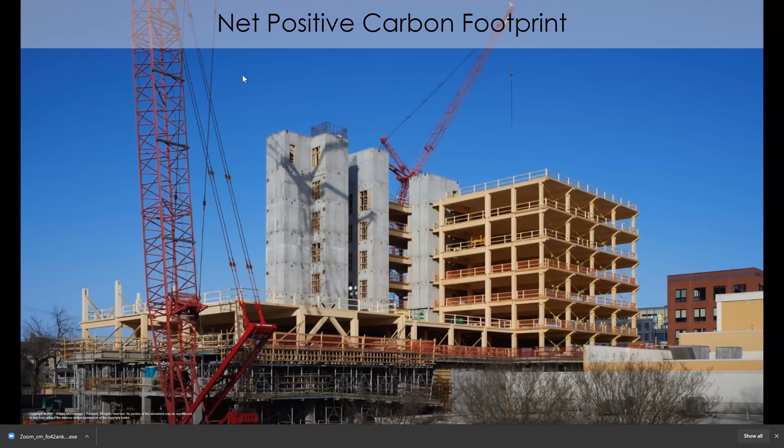Want to talk about Nordic? Yeah, so Nordic's been a great partner. Again, 4 projects with them: an equestrian indoor riding arena, 80-foot clear span structure. They built those beams in one piece and shipped them from Montreal, installed it without a hitch. A stable, which was a CLT stable for the horses, and then HIT Collab, which some of you may be familiar with up in Fairfax.

And now Virginia's first mass timber, Apex Plaza. So again, FSC black spruce, they're about 2 weeks away from being Cradle certified. So the first Cradle certified mass timber product in North America, bringing that healthy material ethos further. They've been great in pursuing that certification with us.

Erection, again, they started phase 1 of that timber we saw in February, and again, just completed about a week ago. So significant schedule advantages. For reference, the concrete, digging the hole, pouring the concrete, all that site work, which some of the concrete is still being poured right now due to the phasing, has been going on for over a year. And they put the wood structure on top of that building in less than 3 months.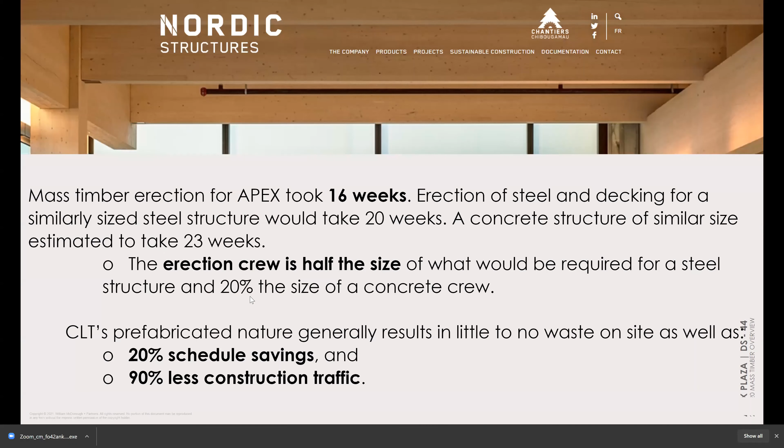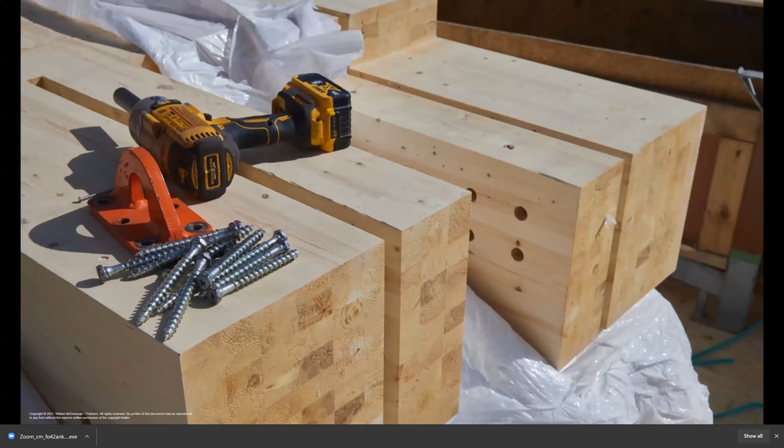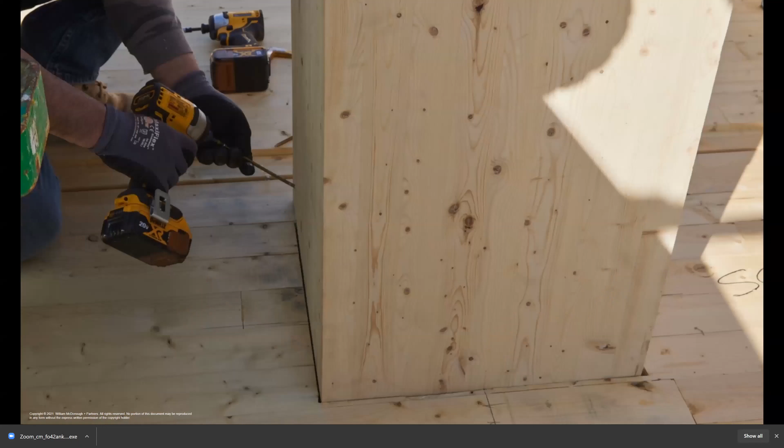I think Joe could probably chime in, but one of the other ones is erection crews half the size. This is a semi-urban site, so the site logistics, you've got less transport, less movement on site. How many trucks a day were we receiving? Yeah, so the north side of the building was the laydown area. They were allowed to take about half of the road. 3 trucks a day coming from Quebec. So the erection crew, Chrisman, had 12 team members on site, handling the construction of the building, staying on track and on schedule.

Yeah, and I think to give a sense of the difference in cross-laminated timber versus steel versus concrete. So, our structure here, a similar structure of steel and concrete like we would typically do in an office building would be probably a 20-week construction process, and we basically use 2 to 2.5 times as much labor in order to get that structure erected. This cross-laminated timber project structure took 16 weeks for the timber erection, and we had anywhere between 9 and 12 workers that were assembling it. So pretty significant labor savings, pretty significant time savings.

If you were to then take that next step further and look at an all concrete structure of the similar size, you're looking at basically twice as long to do that with probably 5 to 6 times the amount of workers. So, much like any new technology, while it hasn't been fully adopted yet, it's coming. And so there's a slight premium to the actual structural product. We found that the speed and, from a developer standpoint, the reduction in schedule means less carry, less interest, et cetera. And so as we look at that, plus the labor savings, time savings, it all adds up. Basically makes the premium for the actual physical products relatively moot.

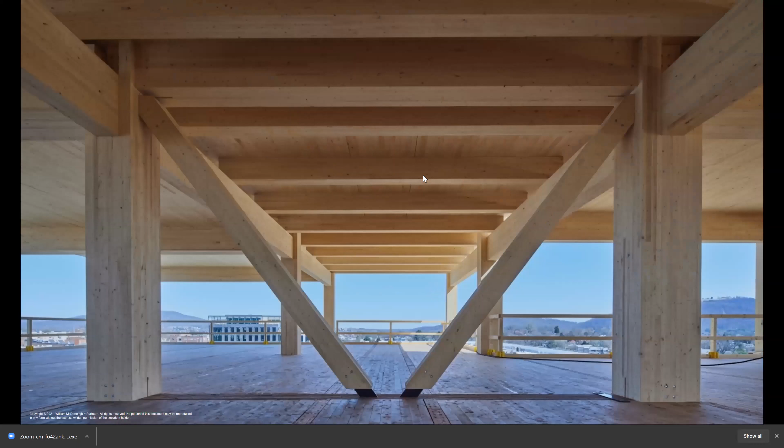Well, and I'd add Nordic, we onboarded Nordic quite early. So another thing was optimizing that grid. As Thomas mentioned, he was restricted to a 30 by 30 grid. Here we're able to go a bit narrower, which reduced the amount of purlins, which made obviously less volume of wood, but also simpler erection time. So that was a critical piece as well. This is a shot of that upper atrium with our skylight slot going apart. It's part of the solar north piece.

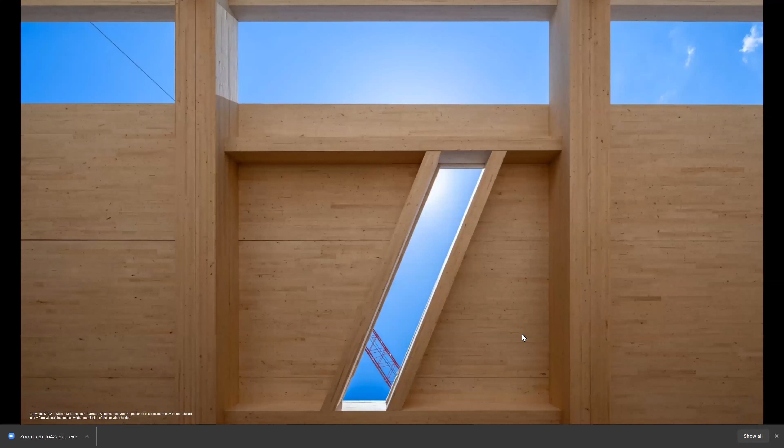Thank you very much for presenting those two most interesting projects. You guys are certainly breaking a lot of ground for our area, and hopefully more to follow. So there's a couple of questions on the Q&A, so I'll just get to them.

First question: the mass timber looks spectacular. However, even with a small event like a fire, it could possibly char the beauty of the exposed timber elements. Any thoughts on what a restoration would entail if that happens, or what is the thought behind repairing any damage to the mass timber?

Well, I could start just from a code standpoint. The char layer, as Thomas showed in some of the sketches, has that built-in char layer, which is sacrificial. But the codes are written around life safety. So the first and foremost is to get people out of the building safely. So the building is still going to be standing. If it was a steel structure, we'd have bending, failed structure. So we'd be actually taking those apart, reinstalling them. In this case, the wood would have that sacrificial char layer, and it could potentially be retro.